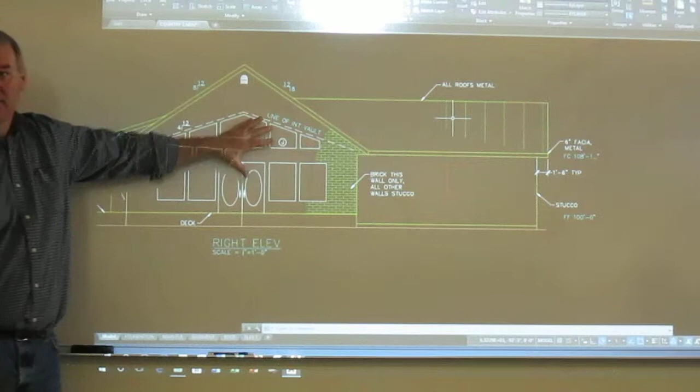You can do 1 if you want here. Whatever, make this thing look good so we get good views off that back side. Again, give me 4 feet here, or you're going to have to take this to an engineer, and you're going to pay another $600-700 for that.

Is that just on this? Just on this wall. I think we can make all the rest of them work.

All right, when you go to put these together, you should now be dealing with some hatching. Try and get your stuff. Go masonry products around this structure.

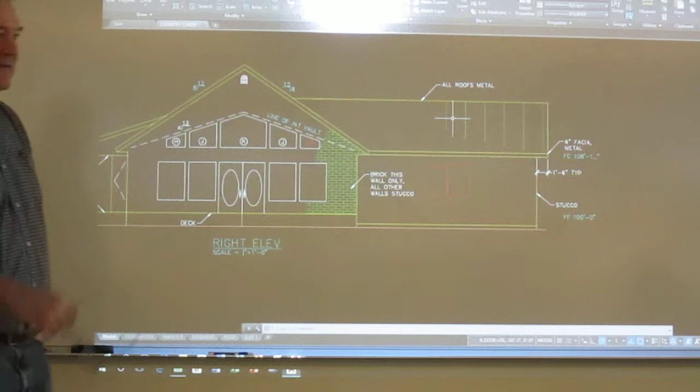I don't have the CC&Rs. I've looked everywhere for them. I've emailed the owner of the lot, he's going to look and try to get them to me. But I remember this thing says all exterior surfaces must be a masonry product - that's stucco, brick, these types of things. No combo, no wood. You can actually go wood, but it's got to be stained. What it specifically states is no vinyl products whatsoever for this subdivision, and they prefer masonry products.

If you want to put some metal stuff that's appealing, like travertine or some of these cool new metals - what's that copper one, tin? No, it's a copper, they got a new material. Our visitor center's got it on it. It's a copper-looking thing, but it wears over time and gets this real rustic look. But it's a lifetime deal. They got some pretty cool exterior products out there.

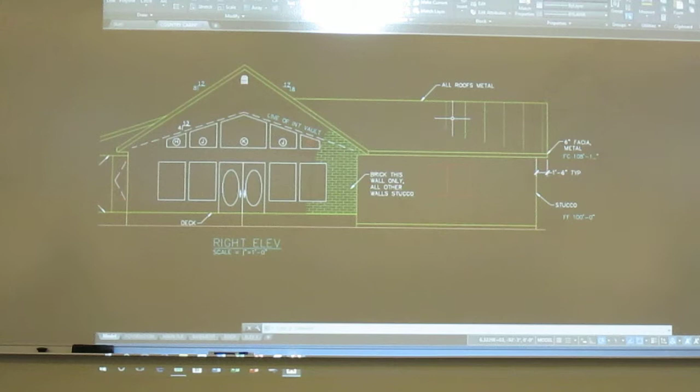Start putting that stuff together. When you go to doing your front deck and your columns and all that stuff, let me see if I can go to the elevation we drew. I'm going to have to do it. Okay, so I've got a deck sitting above this guy, right?

For now, you don't know where your columns are going to sit down here to hold this deck up. Just use your best guess and say, well, I bet you a column goes there, and one goes there. Start putting them in. We'll run the beam calcs, and that's going to tell us where our columns go when we get to there. So you're going to have to guess a little bit on how we're carrying this deck for now.

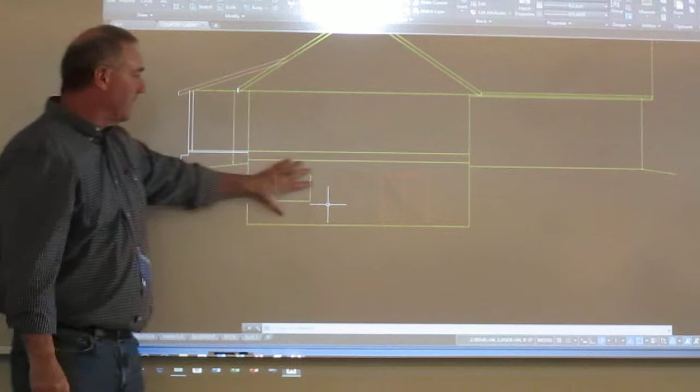So you want the elevation with or without the deck on it? No, I want the deck on it. The deck's part of the structure. Yes, your elevation should have the deck on there.

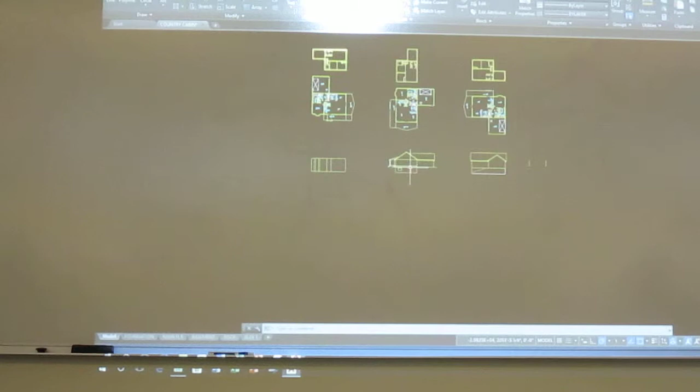Boy, I don't know if I have on this computer a good example of how to do a deck. I don't think I do. I mean, I got some pictures of one, but I don't even know if this one does. No, I can find you some if you need to.

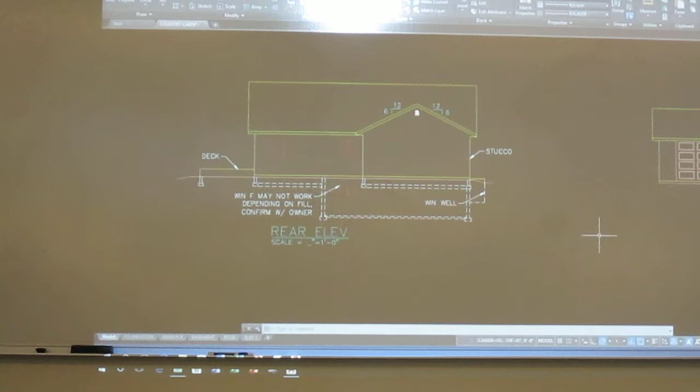All right, now one thing I do need you to put on these is - let me go to the originals. Okay, so what you should have, you must have them turned off. Don't have. Okay, right here. And I better change the color of that stuff.

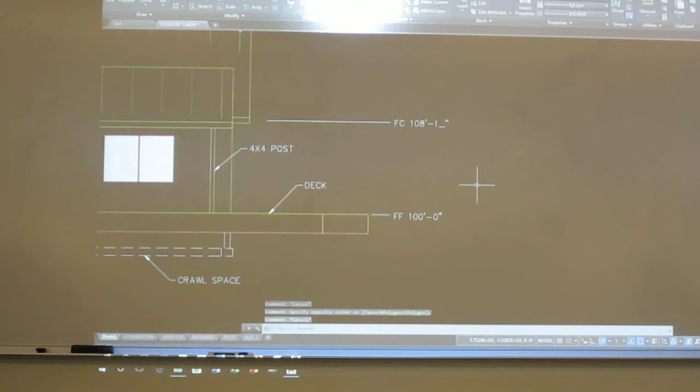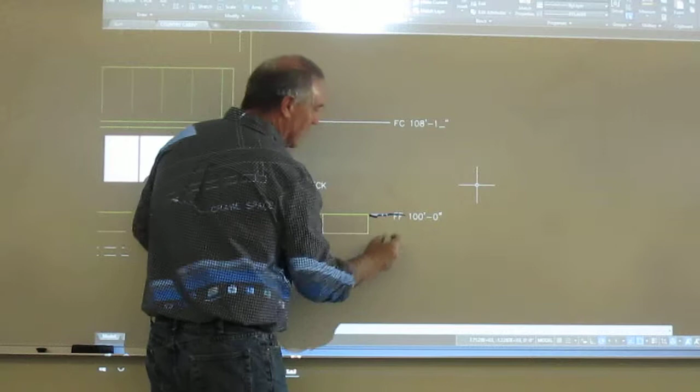One thing I want to make sure you have is your finished floor, finished ceiling lines for both floors. I show them here. In essence, what you do is you come outside the structure, you use a phantom line. So this will be a phantom line, and then right next to it I put FF 100 feet, 0 inches. Now that's for your main floor.

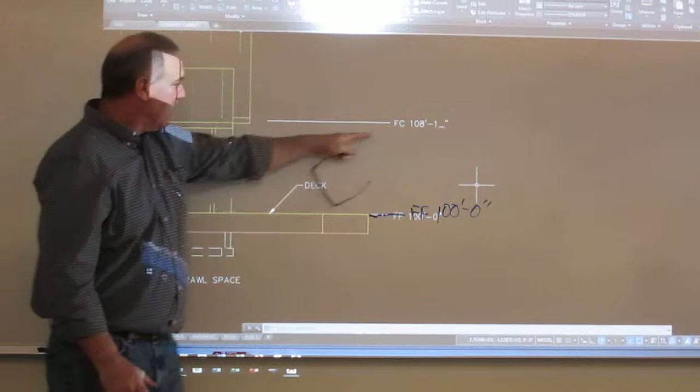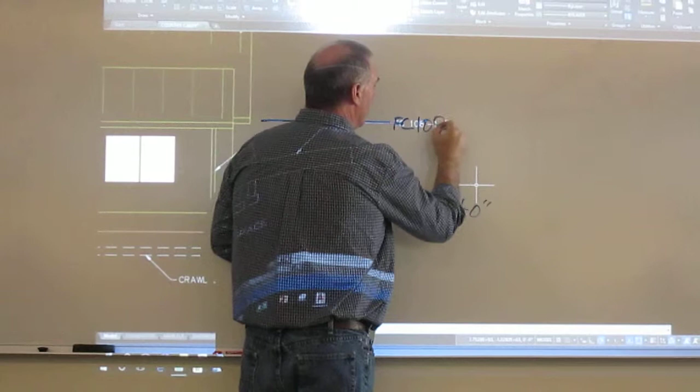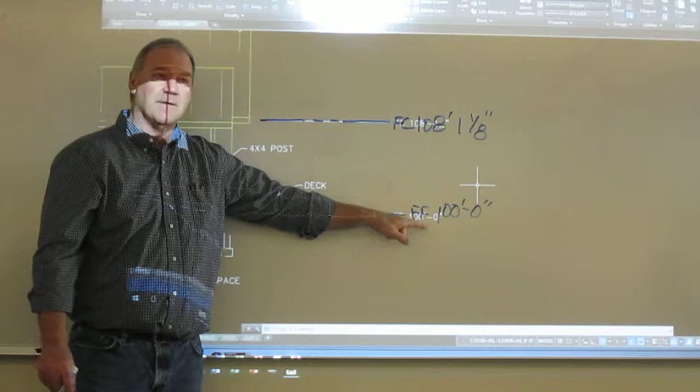Then you'll come up to the ceiling, do another phantom line, and put that elevation in. So this one will be a phantom too, and I try to line them all up so they read right. So it's FC 108 feet 1 and 1/8 inch. Then you're going to have your lower floor finished ceiling, finished floor. Calculate the elevations based off of 100 feet - this is the standard elevation of your main floor, and it's an architectural standard.

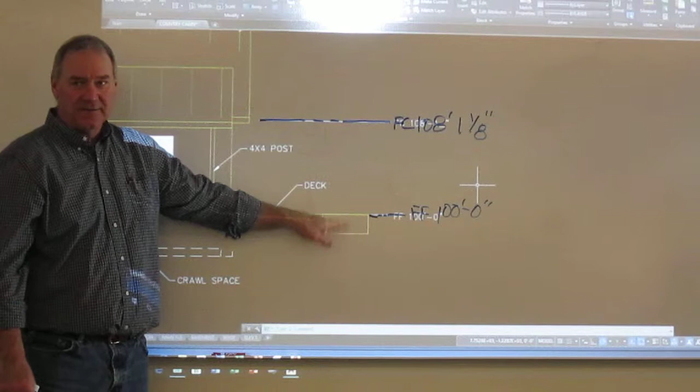So this one down here, this ceiling, wasn't it 14 and 1/8 inches, our floor cavity? So if I take 100 feet, how am I going to subtract 14 and 1/8 from it? That's going to be my finished ceiling, correct?

Well, there's a lot of different ways to do it. Let's do it this way: 99 foot, 12 inches, minus 14.125. Does that help you?

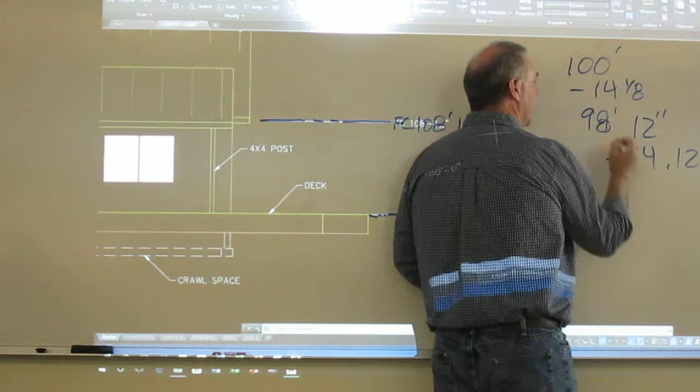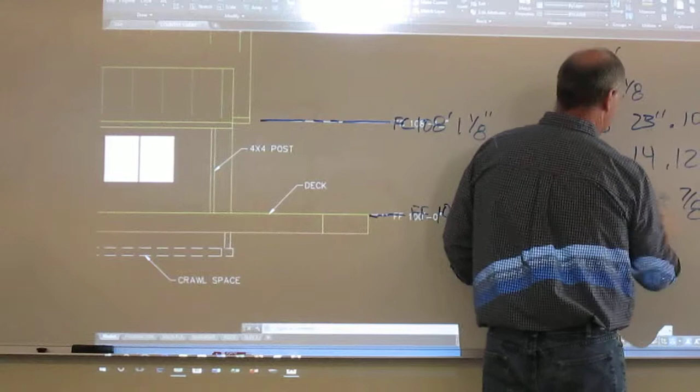How about we do this? 98... let's make that one 24 inches. Isn't that still 100 feet? So it's going to be 98 foot, 23 and 8/8, that's 7/8. Okay, and 23 minus 14 is what? I gotta take my shoes off for that, it's more than 5.

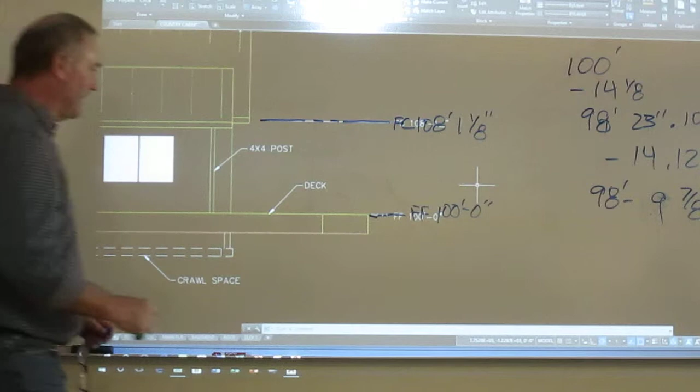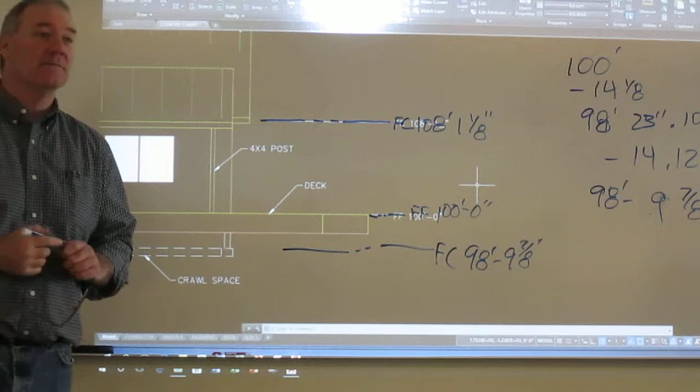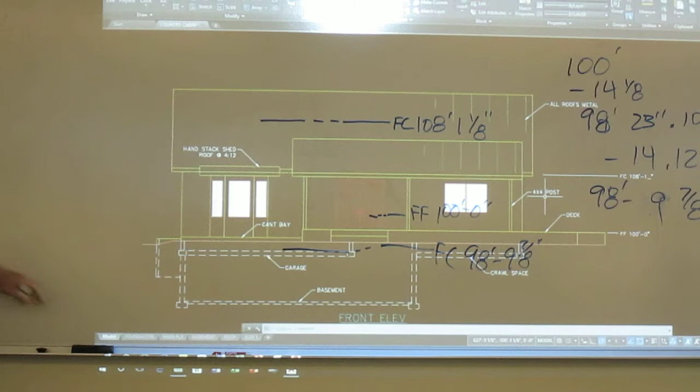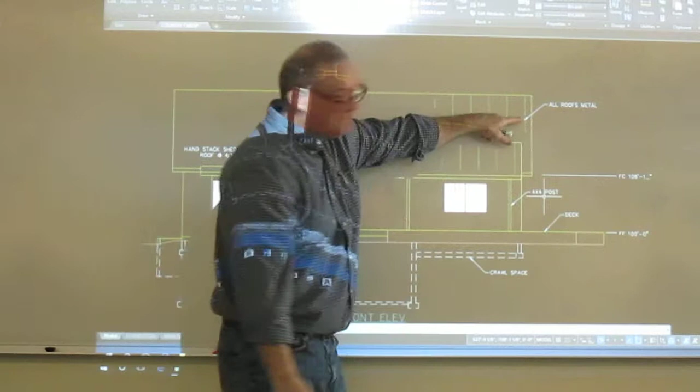So on your basement, you're gonna have another phantom line, and say finished ceiling, right there. You've got this all drawn, right? So you can get all those dimensions right off of it. Make sure you get your height dimensions. Put any roof slope symbols you may need.

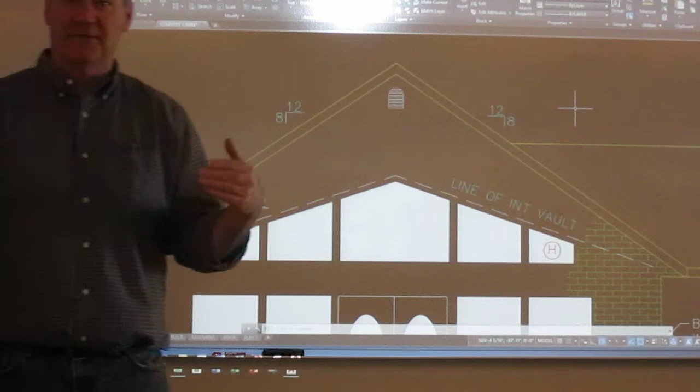So when I see the profile of these roofs, I should have stuff like this. I've got my little 8/12 symbol, got my gable ends. You're going to put everything on here. This view tells the person how you are putting your exterior cladding on this structure, and you need to call it all out. You're not really dimensioning anything, you're using just local notes. Say, stucco this wall, use a hatch pattern on part of it, point to it. Use asphalt shingles, use a little hatch pattern, call it out.

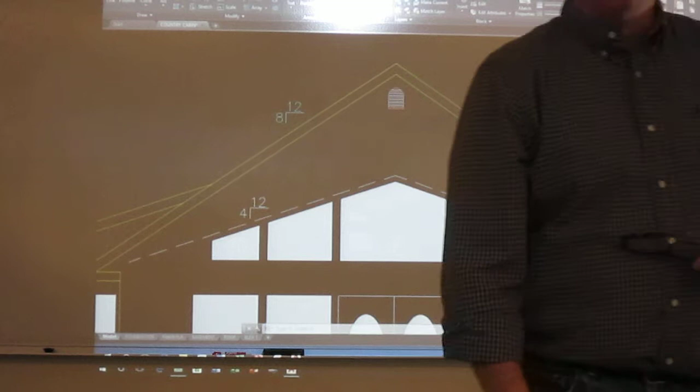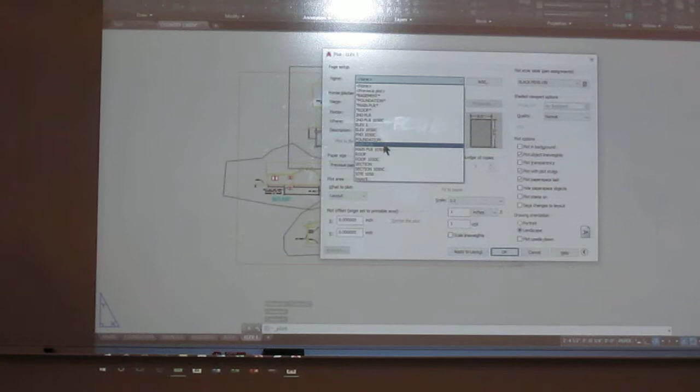Big thing is put all your elevations in there and then work on your materials. Let me go to the plot of this because it's kind of hard to see this on the CAD. I think this is still kind of back to where, that's my PDF one. Okay, so you end up with something that looks a little bit like this. I think this is going to work pretty well for our structure.

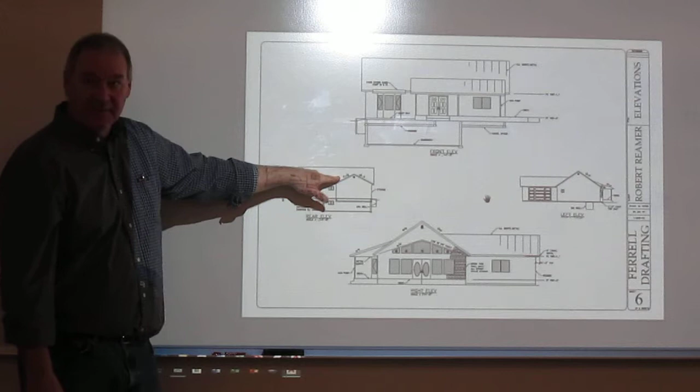Where I've got the front and the right side at a 1/4 inch, the other two views at an 1/8 inch. When you've got your overalls kind of figured out, set up this plot sheet before you annotate. Because if you're annotating one like this that's done at an 1/8 inch, my text still needs to be an 1/8 here, right? I need to be switching my annotation variable. This one's done at 1/4. Know the scale. If you want me to help you with this, I can do that.

I think I want you to put all your elevations on one sheet.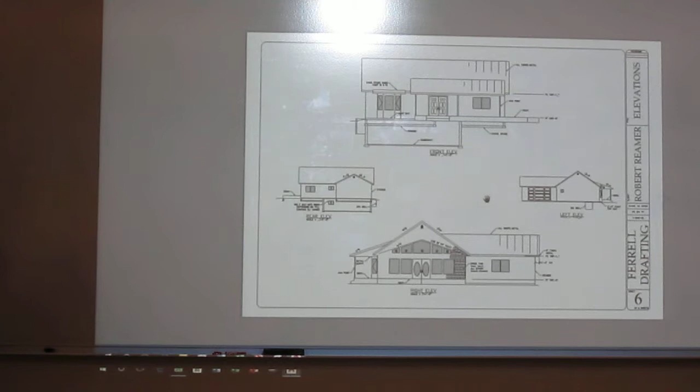Can you print it for us and put it here in the wall? I'm sorry, say what? Can you print this one for us and put it here? There's a bunch of these in the folders. Okay, there's a bunch of these.

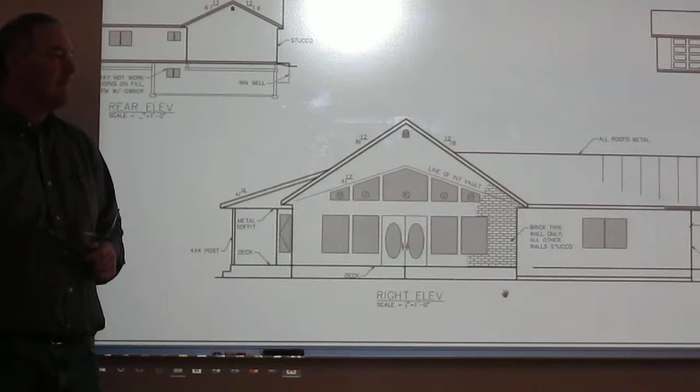This is your house, but it's not your house. Okay. So do you just call it this custom fixed window? Did you have to do the dimensions or just do custom fix and they have it?

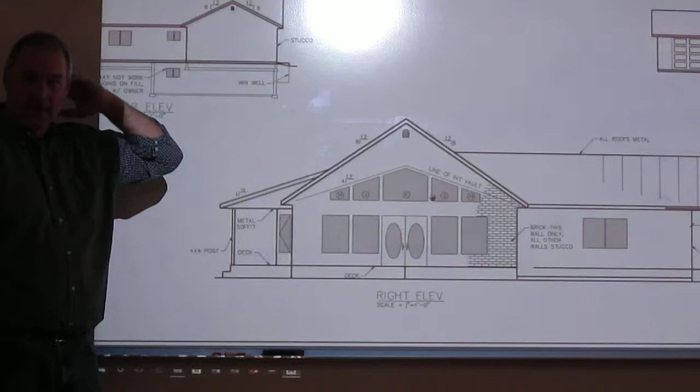You guys want to see how we're probably going to have these windows? This worked really slick. This was a new situation I've never dealt with before - how do I get windows up in here? So I had quite a bit of discussion with other builders on how to do this, and we ended up coming to the fact that let's put them in the gable end truss, because the client wanted these for the view. By the way, you'll see this house on Monday, we'll go look at it. They got a great view, a lot like this one, but it's a much more isolated structure.

But he wanted this stuff, but we didn't want to build that end wall up all the way, because we were running into problems. He didn't want a vaulted roof, he wanted to go with a truss roof. But if we went with a true vault with a ridge down the middle, then it got way expensive when we posted it out - we could do it for 1/4 of the cost of the trusses. So we had to figure that out, and that goes with the trusses. Now I've got to give the truss designer all this information.

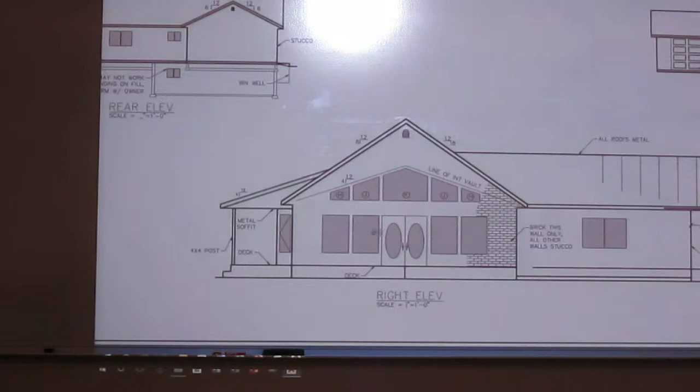You never see these windows in a floor plan, right? Because the floor plan's a section cut here - you don't see these windows. So what I ended up having to do on this thing, and it's just something you might have to kind of figure out, is - let's see, where did I put those? Let's see, basement - oh, I put it here on my basement plan. Let me put the prints of this up.

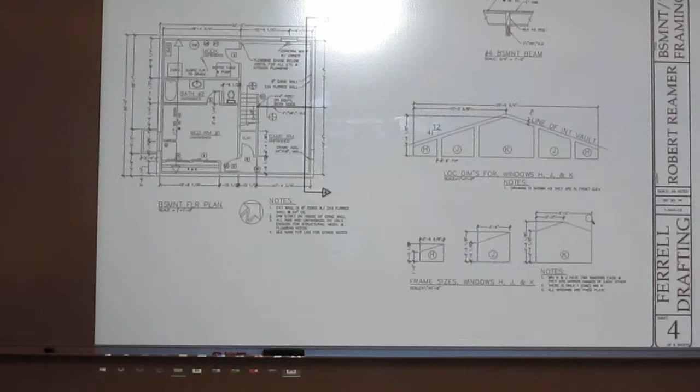Okay, so I called them out in that elevation, and I put a note on my window schedule saying look at the right elevation for these window locations.

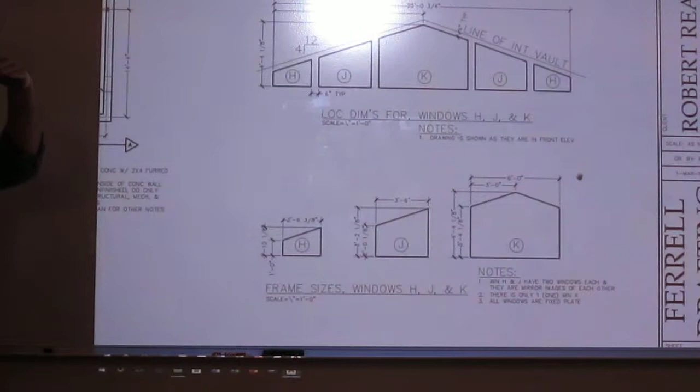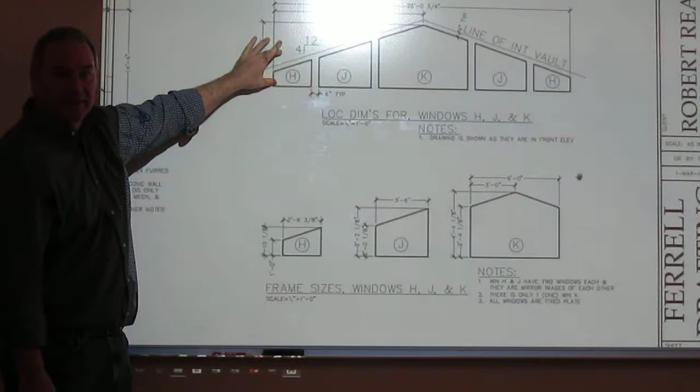So it's on my window schedule. Then I had to come in and give all this information for the truss designer, because he's the one that has to come in and make this opening in that truss. And then we just stick the window in.

So what I did is I came through and thought I better give them an overall on the window sizes. There's really only 3 windows here. These two are mirrored over here, right? And then I gave them the overall opening.

And I correlated it back. You're not seeing, I got my line weights wrong here, they've gone bad. This is that line of the interior vault, it's the same one on the elevation. So this was just copied off to another area and dimension.

And yeah, you're probably going to have to do it. Once I figured this one out, this works so well. I've done it on several other houses since then. It's really a nice way to get some upper windows into these types of rooms, and doing it very cheaply, as opposed to the alternatives.

So what happened was the builders just did everything up to the bottom line, and then it was left open, and then the truss people basically did the windows with the truss. Yeah, they were built at a plant. So we set the windows, truss down, boom, it's done.

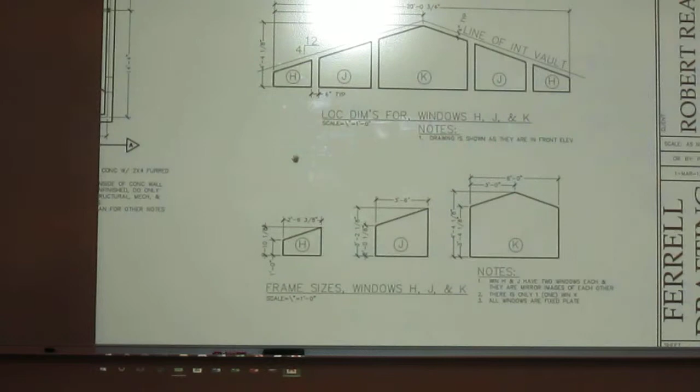So basically it was a truss, except it came down and had those.

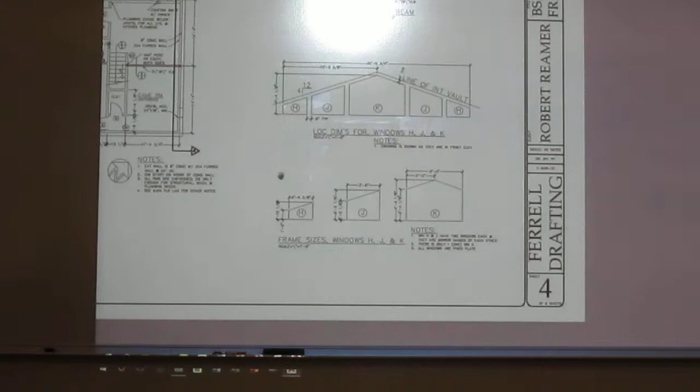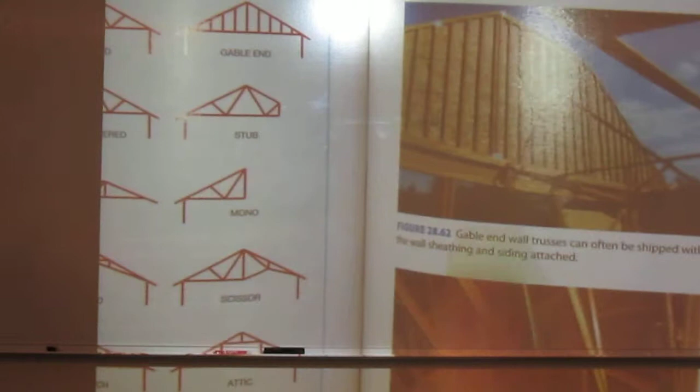Okay, got two pictures here. Here's a gable end truss. 'Cause you're having a hard time visualizing this, this is a gable end truss.

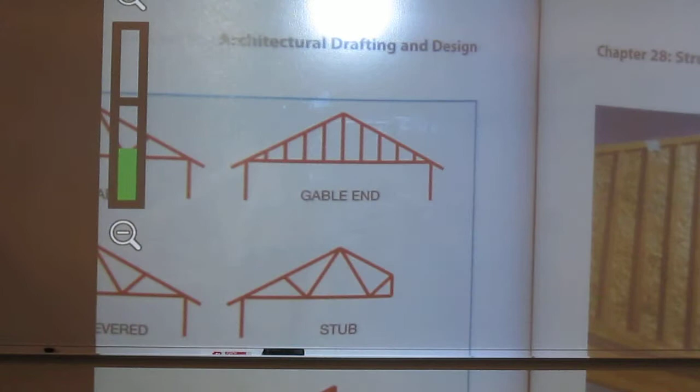Okay, so all we did was have the truss, I want to use a pencil because I don't want to write pen on this. We just had the truss manufacturer come in here and build me a little window spot.

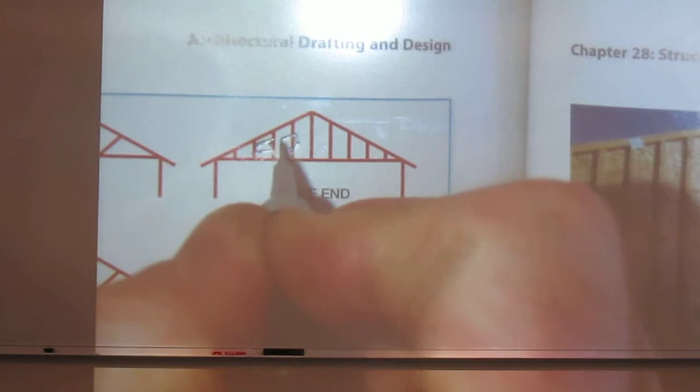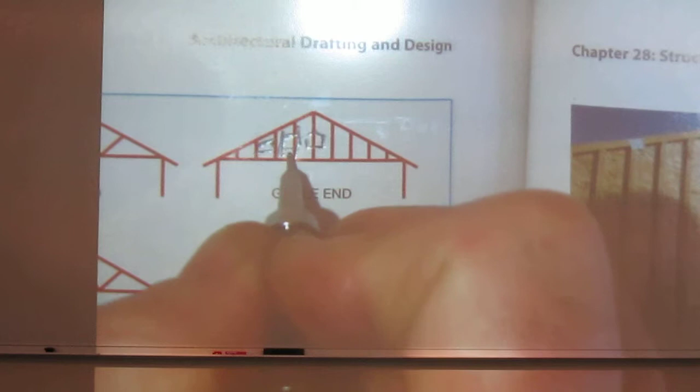Okay, and they just changed all these boards in here for headers, stuff like that. They just built it right into this guy. So then all we had to do is take this, crane it, drop it on, slap them in, and you're off and going.

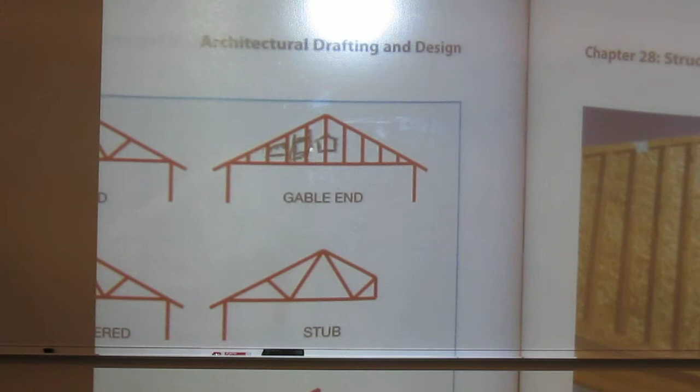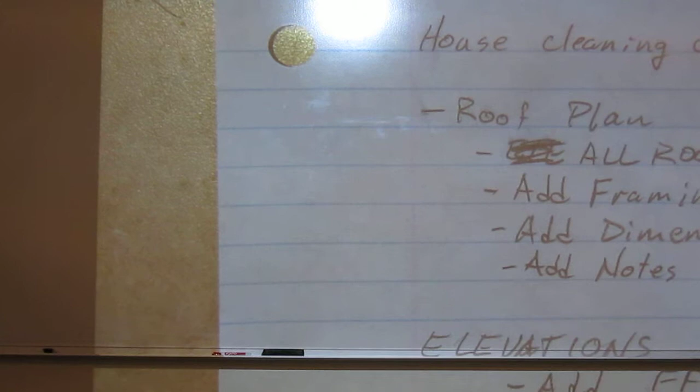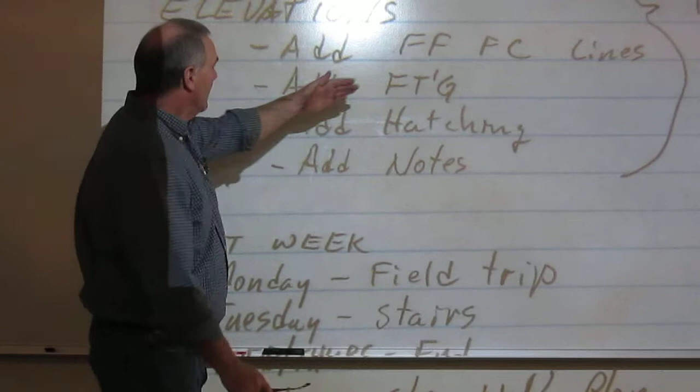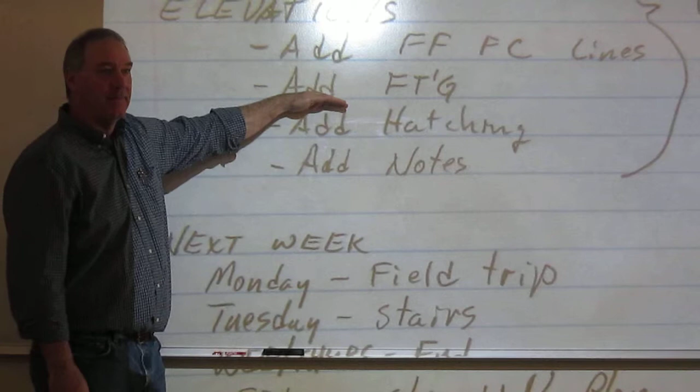Right here, the footing part, I'll come back and handle that when we get to the foundations. We'll add to these. Okay, so right before you get here, you should have your print sheet set up. Then add your hatching, add your notes.

It's a lot more than I wanted to take of your time today. I was hoping we'd get a lot of draw time, but I chopped into that a little bit. So I'm going to stop there. Are there any specific questions you have for me?

So what would you say we need to be focused on right now for today? What should we be focusing on?

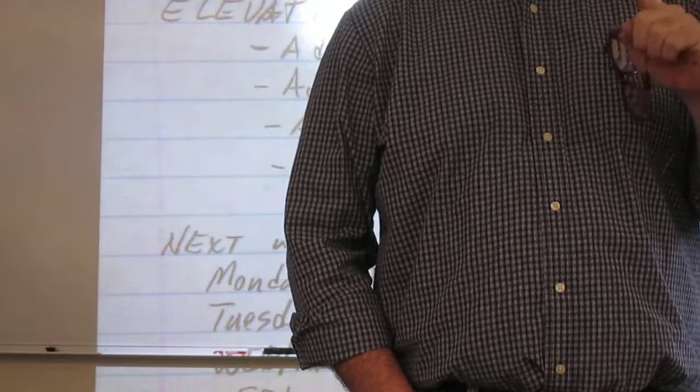First step would be fix any geometry, dimensions, locations that come off of the red lines of your floor plan. Not everybody's got those back. I took Majed and Missy's home last night and never even got to them.

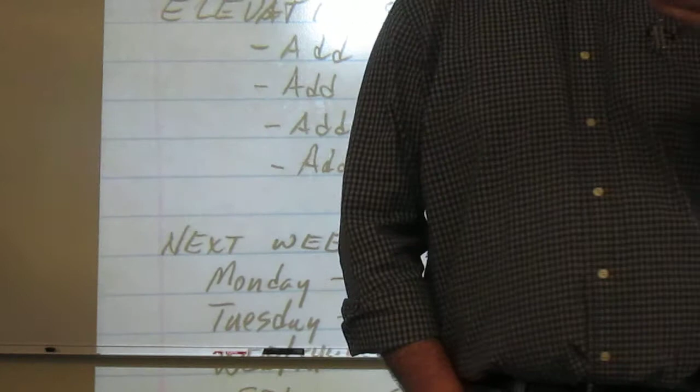Okay, I'll get those done today. Cheryl's, yours is still in the drawer, I haven't gotten to yours. Gabe, I haven't gotten to yours yet either. So you can't do that, but those of you that have, that's your first step. Okay, get that stuff fixed.

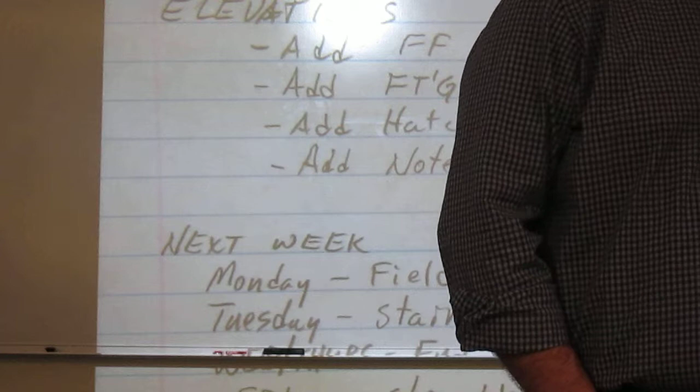Second step would be finalize your roof. Okay, try and set it up to print. So you've got your zones in it, you got your framing on it. I'm not sure if you've got your little exterior roof stuff done. Put your notes in it, get that done.

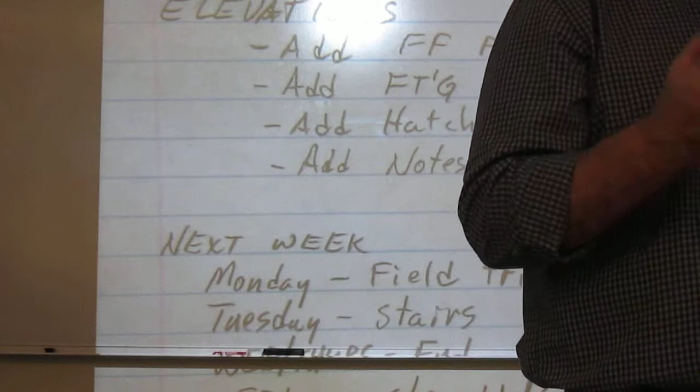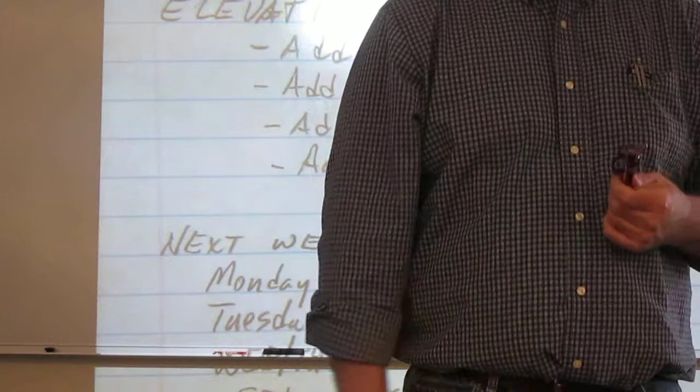That ought to be your next step. After that, I would go straight to your elevations and try and get those to a stage where we can print them. Okay, by that, you've got all your shapes completed on it. You've set up your print sheet. You're starting to add hatching and notes for those materials. Okay, so that would be my order of priority.

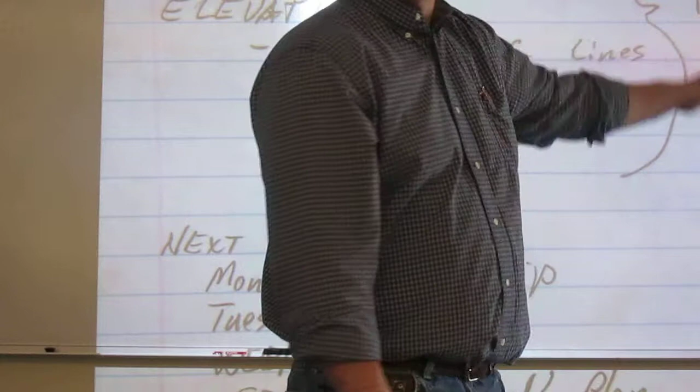Okay, maybe what we ought to do is put this up on the board. And homework for this weekend, make sure you preview chapter 39, specifically those tables. That's what you really need to know.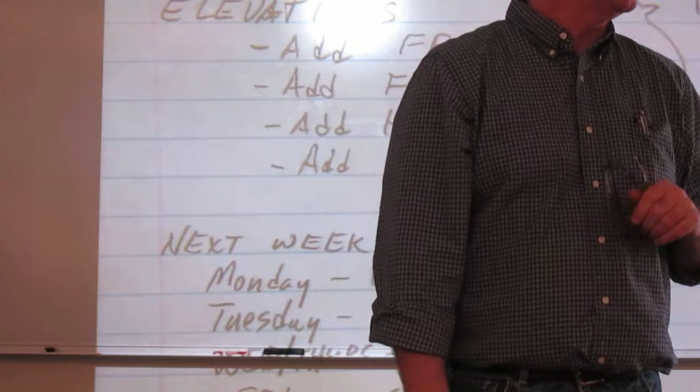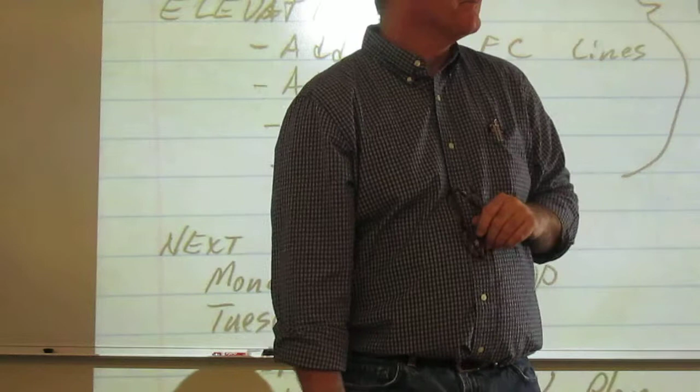Majid, you had a question? You said you'd teach us today how to print the blocks to be ready for Monday, lots 7 and 8. Oh, okay, I don't know, let's just print them out of model space.

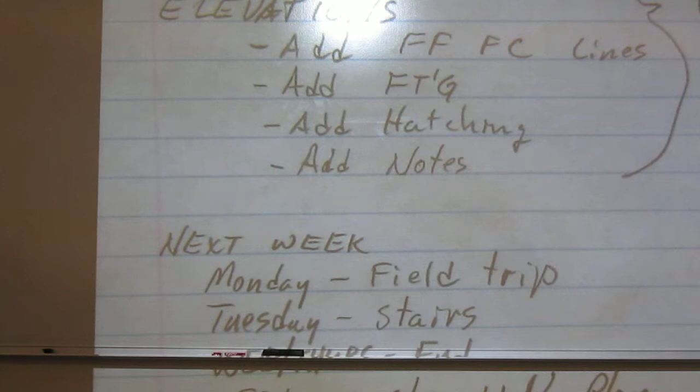Where's this thing at? Wrong drawing. Okay, so we've got this guy, right? So you got this character. You might want to help yourself out by labeling it a little bit, like this is lot 7, this is lot 8. Maybe throw a little text on the side.

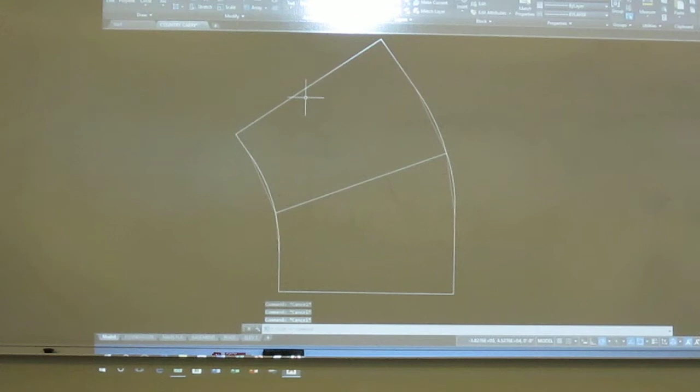All you would really need is not the azimuth, but the distance. Okay, now let's just figure out what size we want to plot the thing first. I think you're going to want it on a B sheet. So I'm going to just print right out of here.

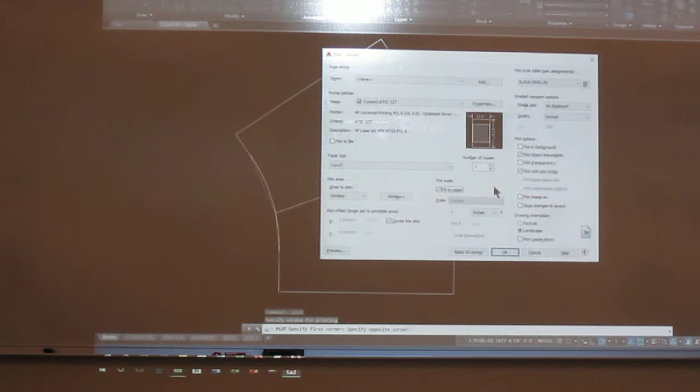Here's a quick way to find out what you're going to plot something. So I'm going to just shoot it to the M725, go to a B sheet, and snap a window around it. When you snap a window around it, click on fit to paper, and it will calculate a ratio of the window you did. It's saying 1 to 500.

Okay, so now we want to stick with an architectural scale. Do you have an architectural scale that's 1 to 500? 1 to 600 is 1 inch is 50 feet, or 1 inch to 6 feet, 50 feet? Yeah, that's actually a civil scale. Do we have an architectural scale that would get us there?

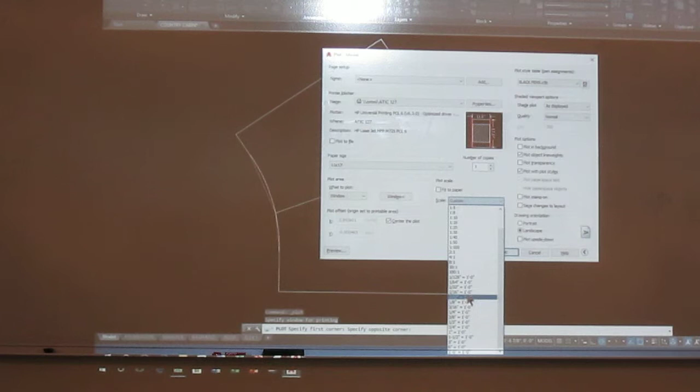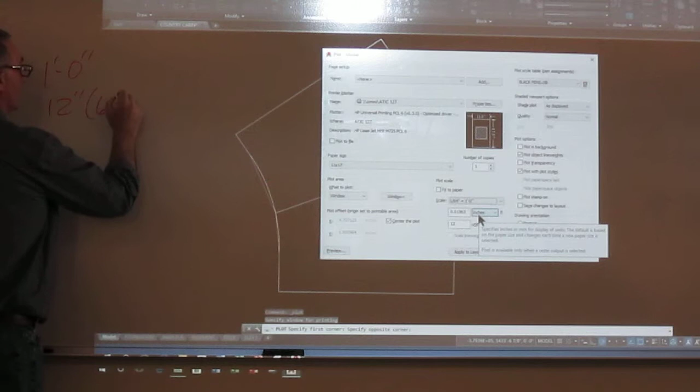Take off fit to paper then, and start looking at those. I think you do, you have 1/64. What's the DSF of 1/64? That's going to be really close, okay, because if 1/64 is equal to 1 foot 0 inch, this goes to 12 inches times 64, doesn't it? What's that number?

You got your little slide thing, does it have a 1/64 with a DSF on it? No, that probably only goes up to 32nd, right? That's 768, okay, so that's too big. So we should have another one in there. What's a 32nd? Isn't that 298? 384? 384? Yeah, so we've gotta stick with the 64.

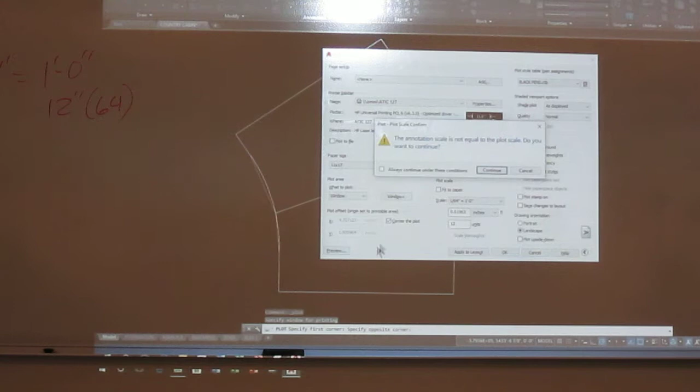So I'll just use that one and preview it, see what it looks like. Okay, that's the size of it on there. You do want something to scale. You could make a scale on here for 1 inch is equal to 500 feet, but don't forget that factor of 12 that's in here on this guy. That's good enough though, that's all I really need.

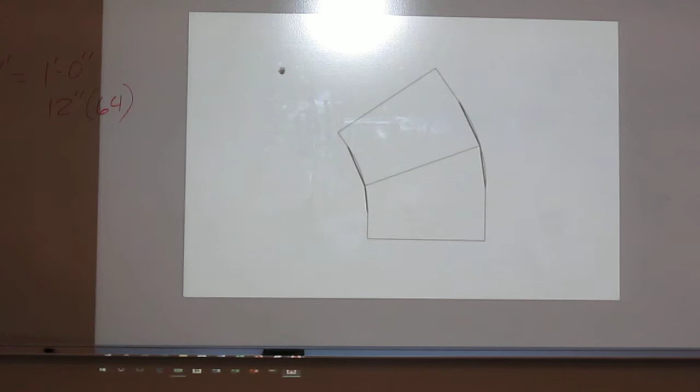This thing might look better in a portrait orientation. Maybe I can reduce the scale to a 32nd if I go portrait. Just kind of play with it a little bit. Let's do 11 by 17. Let me switch this to a portrait and go a 32nd. Let's see what that one looks like.

Darn, not gonna work. So I'll go to a 64 B sheet. Again, Majid, I would recommend label the length of the sides because you're gonna want that reference.

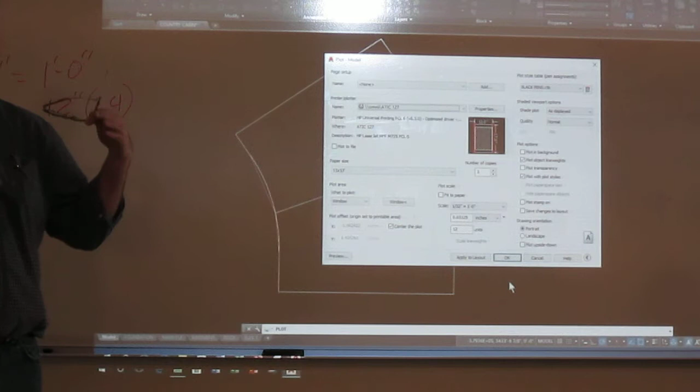You're standing out there in the field, we're gonna see the side of that lot and you're gonna see on there, oh, that's 300 feet. And it's gonna give you a reference out in the field. That's all you gotta do.

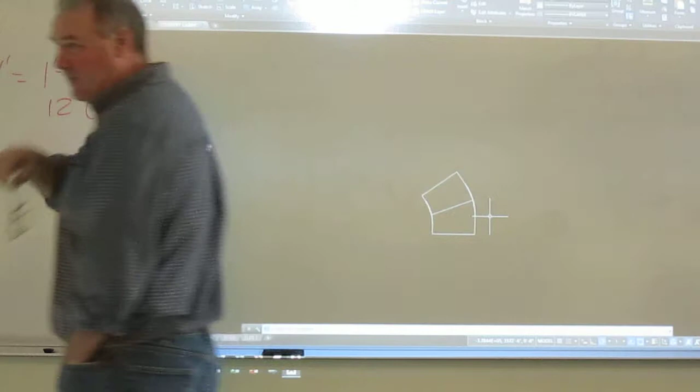Any other questions? Thanks for reminding me of that, Majid. Anything else? I noticed you didn't delete your straight lines, do you want them on there? I'll delete them for the final.

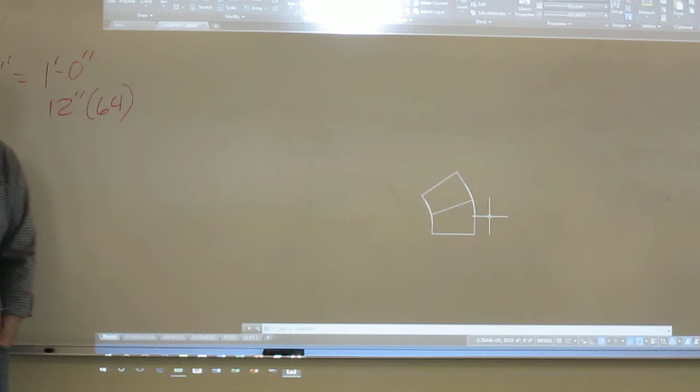Okay, yeah. And as far as what we wear, just normal shoes, normal clothes? You're gonna be in the dirt. Wear clothes for working outside. It's supposed to be warm, low 60s, but at 9 o'clock in the morning it'll still be chilly. Be prepared, I have no idea if the wind's coming up.